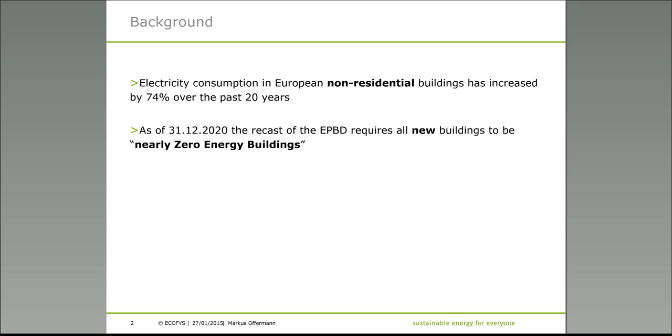Arising from this background, the examination should bring light on the following questions. The first question asks, are there special types of buildings which offer to benefit best from building automation? Second, which type of energy demand or which types of renewable energy are most suited to control? And the last two, what can be done to help policy towards regulation regarding building automation to firstly reduce the energy demand of future non-residential buildings significantly, and what can be done to optimize the use of renewable energy?

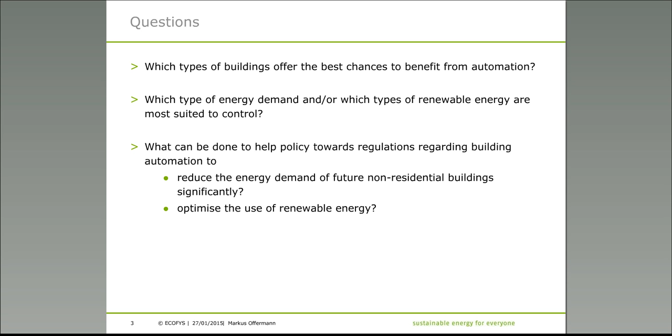To solve these questions, it is necessary to understand the energy demands and flows of non-residential buildings, which are in focus of this study. Compared to residential buildings, non-residential buildings consist of a significant share of electricity for lighting, ventilation, and cooling, but also for equipment, which is not considered under the EPBD.

A look on the different non-residential building types shows that, firstly, low shares can typically be observed for buildings which often consist only of very simple technical equipment like schools or hotels. Higher shares of electricity can be observed for buildings with a high lighting, cooling, or ventilation demand. A typical example here is a supermarket. Office buildings are somewhere in between, having an electricity share compared to the total building-related energy amount of about 30%.

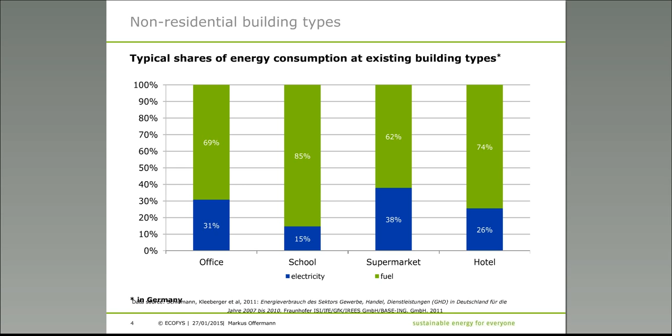You should consider that those figures relate to existing buildings. Considering nearly zero energy buildings, this picture will change, as we will see. But first of all, the question, what is a nearly zero energy building? According to the EPBD, Energy Performance of Buildings Directive, a nearly zero energy building is a building that has a very high energy performance. The nearly zero or very low amount of energy required should to a very significant extent be covered by energy from renewable sources, including renewable energy produced on-site or nearby. So that is the official definition from the EPBD.

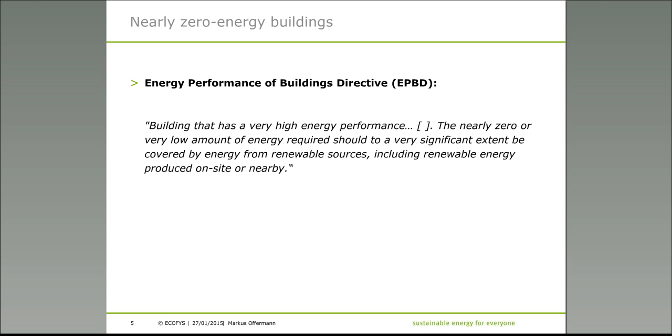You see, the expressions nearly zero and very low leave a lot of room for interpretation. But at least the nearly zero energy buildings have to be cost optimal over a period of 20 years. Also, although the national definitions are mostly still not fixed in detail, it will be sure that on average the energy demand of new buildings will need to be reduced significantly. What that means for the shares of energy demand is illustrated in the following picture at an example of a 3-story medium-sized nearly zero energy office building at different locations in Europe.

Independent from the climate, the heating and cooling demand is less than 50% of the total building-related final energy demand. Including appliances, without considering heat pumps, more than 70% of the required energy is electricity. As you see, the role of heating and cooling demand is not more outstanding as before, and now in the same range as the demand for lighting and ventilation, controls and pumps.

Regarding renewable energy potential on-site, the picture also indicates the achievable PV yields, considering here 30% roof coverage in the different regions. Considering an annual balance in Northern and Central Europe, about 50% of the building-related energy demand can be covered by PV. High direct PV coverage rates can be reached for cooling, for ventilation, and appliances. In southern regions, the annual coverage can reach 100% and more, surely only when considering an annual balance.

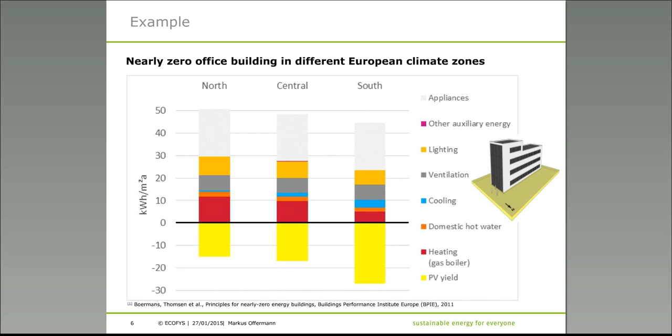From the picture, it can also be derived that if a significant share of renewable energy from PV should be achieved, the building height should need to be limited to about 3 levels. Besides PV, the only control-relevant renewable energy source on site is solar thermal energy. Solar thermal energy is especially suitable to cover thermal energy demands during the summer season. Therefore, it is typically used to cover domestic hot water demands, but the domestic hot water demand of most non-residential buildings is very low. Exceptions are hotels, hospitals, or surely indoor swimming pools.

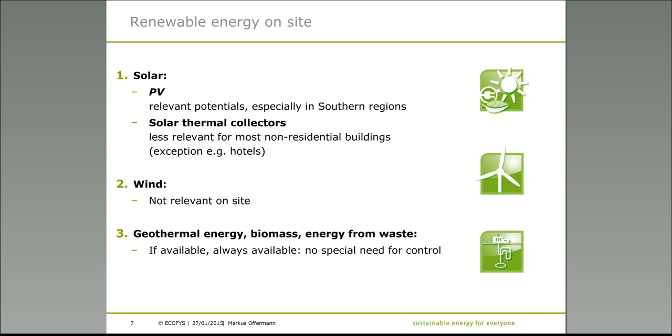Regarding on-site, wind is not a relevant renewable energy, but off-site, the European electricity grids will have to solve the increasing shares of uncontrolled renewable wind energy. Further renewable energy sources like geothermal, biomass, or waste heat are always available and therefore typically do not require special control to increase their usable shares. To increase the share of uncontrollable renewable energy sources, suitable energy storages are required. There are many types of energy storages for heat or electricity and different sizes from small to huge seasonal storages. I want to highlight here the cheapest one, the thermal building mass.

In a nearly zero energy building, the heating and cooling demands will be decreased significantly, but not the thermal building mass. As the solar and the internal loads are in the same order as the heating load, the load shifting potential related to the heating demand gets significant. The increased influence of the thermal mass also allows to increase the share of renewable energy on and off site. Nearly zero energy buildings are very flexible in time of the day when to provide the necessary heating or cooling energy. The use of on-site renewables can be increased, for example, by a combination of PV and cooling. A grid stabilizing control is possible by using heat pumps or CHP.

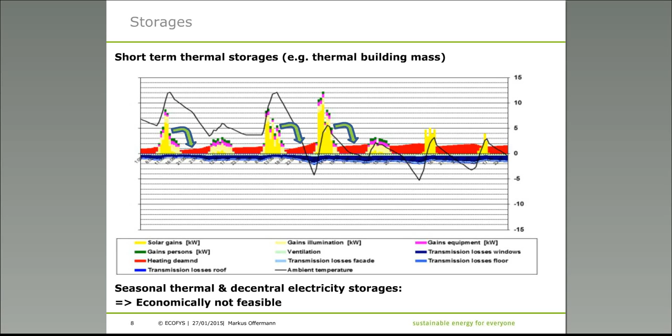When summarizing all that background, what does that mean for building automation? To answer these questions, we have distinguished the main functions of building automation in this context. The first considered function is central concerted control of all energy-related components. The second, monitoring and providing feedback. Thirdly, as already highlighted before, we have load shifting and storage management. And last but not least, relevant is also ensuring the thermal comfort.

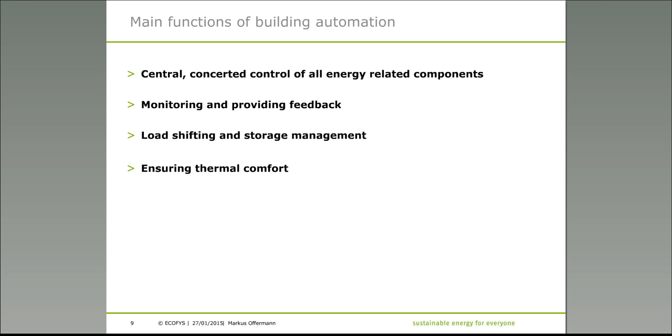Let's take a look at the potentials of building automation for the different functions, starting with the function of central concerted control. As building systems are actually often controlled individually by central controlling, for example, blinds and lighting in dependency of each other, as well as in dependency of heating and cooling demand, building automation offers saving potentials of up to 50% in nearly zero energy buildings.

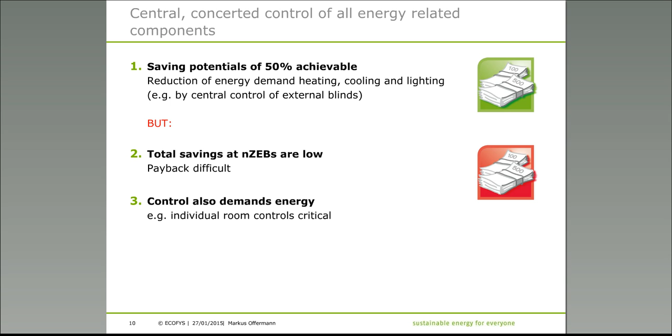But there is a but. Although the saving potentials of central control can be huge expressed in shares, as I've done before, the absolute savings at nearly zero energy buildings are limited, which makes the payback usually difficult. Furthermore, it also needs to be considered at the determination of the potentials that the controls themselves also need energy.

Monitoring and providing feedback. To ensure that there's no gap between calculated and real energy demand, which is essential for achieving the climate targets, building automation is required to discover the differences and to offer possibilities to overcome those. Actually, insufficient parameter settings or deviations from planning often lead to significant gaps. One example to mention here is, in case of heat pumps, the system temperatures, which have a significant influence on the efficiency of the whole system.

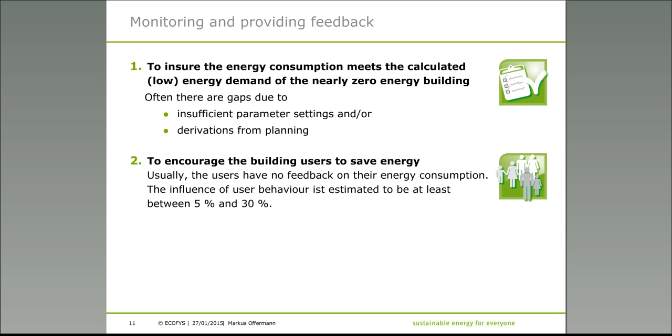The next point is providing feedback. Providing feedback to the user has impact on his or her behavior. The potentials of this can be estimated to be somewhere in between 5 and 30%. The potentials of load shifting in insulated buildings have been discussed in detail before. This flexibility can be used for solar and internal loads during the heating season, and you can use night cooling during the summer. With flexible electricity tariffs, the controlled heat supply by heat pumps could offer an economically feasible contribution to grid stabilization.

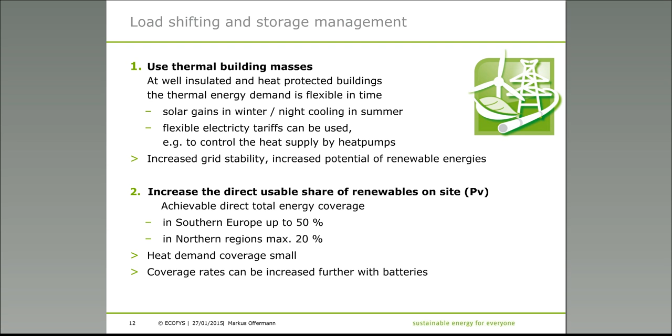Looking at on-site renewable energies, the achievable shares of total energy coverage by PV range from 20% in northern regions to up to 50% in regions with high cooling demands. The potentials of heat demand coverage of on-site renewable energies are small. The coverage rates could for sure be increased when using batteries, but as said before, they are actually not economically feasible.

The last potential of building automation I want to mention here concerns the thermal comfort. At nearly zero energy buildings with a small thermal mass, only little energy amounts are needed for major changes of room temperature. Therefore, in those buildings, a sophisticated control is required to prevent discomfort. The same accounts for buildings with a very slow but highly efficient low temperature heating system or high temperature cooling system, like a concrete activation.

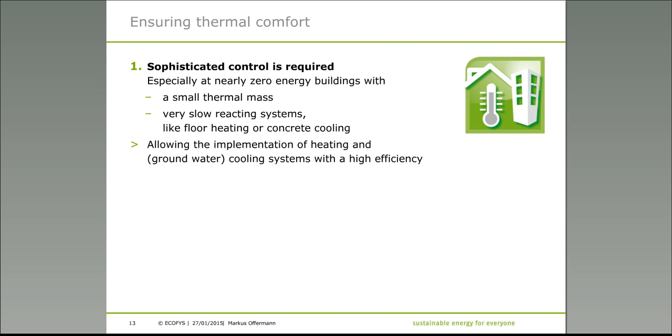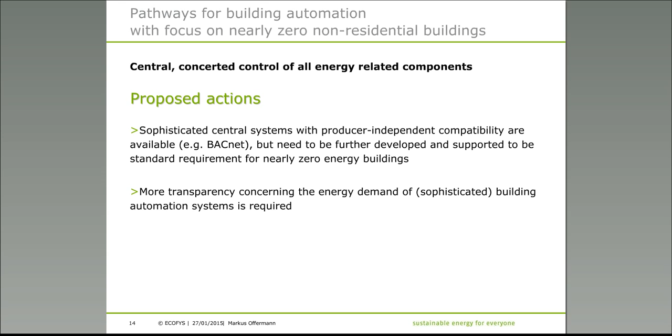Finally, we tried to answer the question: what next steps need to be done to get building automation ready for the requirements of nearly zero energy buildings and to unleash the before mentioned potentials? In case of the required central control function, we think, although central producer-independent protocols are already available, these systems have to be developed further to become standard in nearly zero energy buildings. Furthermore, transparency concerning energy demand of control systems is required. This can be initiated by producers or should be required by regulations or labelings.

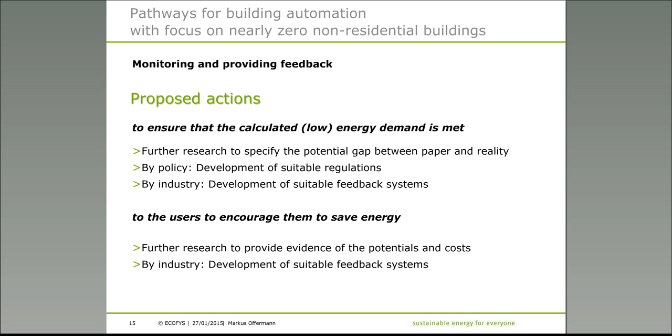Concerning monitoring and feedback, further research at nearly zero energy buildings in operation would be necessary to discover the critical items. Once these critical items are discovered, suitable standard feedback systems need to be developed, which then need to be required by regulations to ensure that finally the climate targets can be met. Concerning individual feedback and control systems, actually only very limited studies on saving potentials of those exist. In case significant potentials can be evidenced, the task of the industry will be to develop simple, effective and affordable systems.

Load shifting and storage management. As indicated, the expected potentials of load shifting and storage management are significant, but also dependent on the building type and region. Once the national nearly zero energy requirements are fixed, detailed examinations should be performed to define suitable requirements on that topic. Electricity suppliers should offer flexible energy tariffs; that will for sure be a strong driver for building automation controls, which finally will contribute significantly to grid stabilization. Concerning the increase of shares of renewable energy on site, which is mainly PV, the market recognition could be increased by a collection of best practice examples.

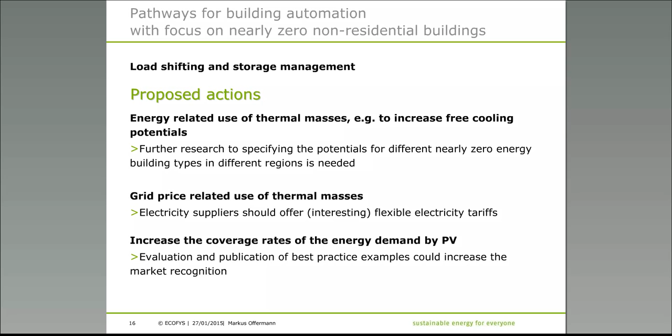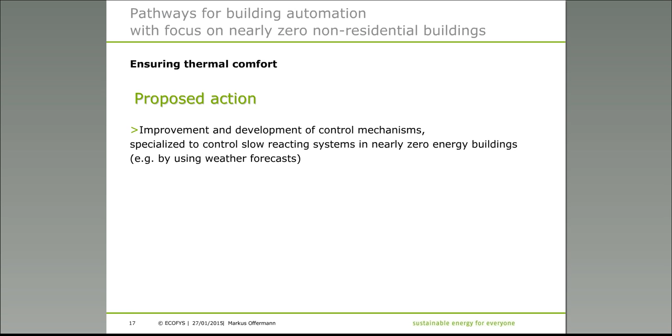Finally, within the topic of ensuring thermal comfort for nearly zero energy buildings, we see the necessity for industry to develop suitable controls for slow reacting but highly efficient systems like concrete activation, for example by using weather forecasts. So this is my last slide. All in all, although there are still some points to solve and questions to answer, building automation will and has to play a significant role for successful realization of nearly zero energy buildings in the future.